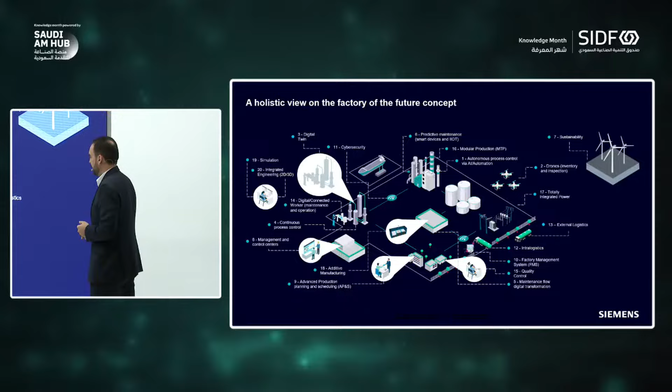So today, there is always a saying, what is the factory of the future? How today Saudi, SIDF, and the industry in Saudi can take it to the next step. If we want to summarize it quickly, there are at least 20 to 25 different technologies, main pillars, on how we can cover end-to-end value chain when it comes to digitalization.

All the way from the raw material part, how you source your raw material, how you ship it, how you clear it, how you manufacture it, how you package it, how you process it, and then even how you distribute it. All of these technologies make it difficult for companies, even tier 1 companies, to select which technology to use, which project should start first, at what pace, and does it make sense from a financial point of view to invest in these technologies?

Are these technologies really the right match for my processes? A lot of questions that we face with tier 1, tier 2, even tier 3 companies, asking does it make sense or doesn't it?

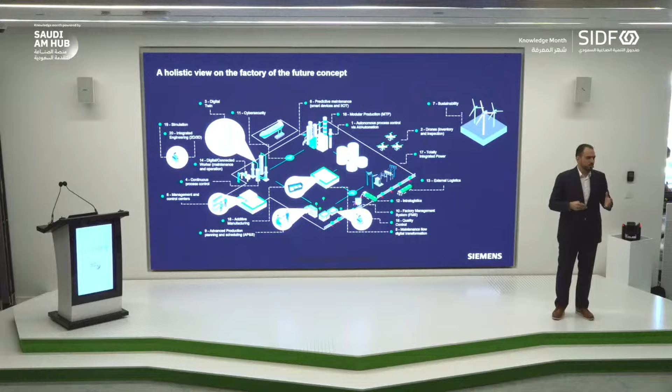And this is where we thought that digital transformation is not one fit for all. It is a tailored approach because it takes into consideration your objectives, your KPIs, your challenges, your existing landscape, and of course your future expansion or development plan.

So now I will shed some light on a title that is close to my heart because this is where I started at Siemens. I started 5 years ago as a digitalization consultant, and I've been blessed to work in Saudi with a lot of companies on this, and in UAE and Jordan. It was mainly about green, lean digital factories.

The question was, I'm a factory owner, I'm an operator, how can I maximize the utilization of the available resources? I don't want to make a mega trend when it comes to investments. I don't want to come with something totally heterogeneous for my setup, yet I want to double my productivity. I want to reduce my operating cost. I want to cut off all the fat I have in production, reduce my waste, etc.

A lot of questions, and this is where Siemens, along with a lot of tier 1 consultancy firms, came to an agreement that we need to work it out. This was at the time a cooperation between Siemens, BMW, McKinsey, to create something called the SIRI Index. I'm pretty sure you are very familiar with Siri. This is exactly the point, so we said we're going to create a framework, a methodology on how to do it in a systematic way.

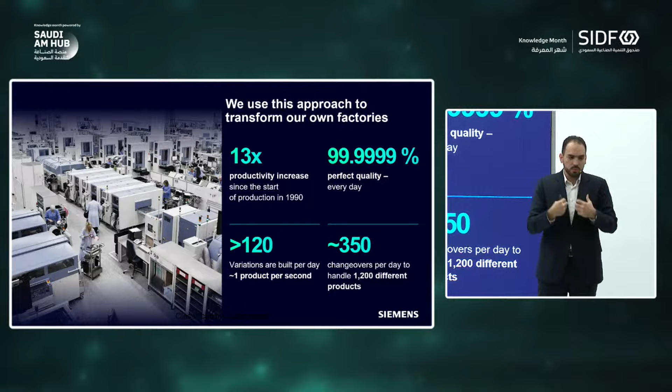It's worth mentioning that Siemens owns over 130 factories globally. This is where we manufacture our own hardware that you see everywhere in your day-to-day life. And this technology or methodology that I showed you today was applied to our factories. This is where we started, because we recognized that we need to do it ourselves, learn it, master it, and see the value out of it.

And since 1990, we were able to optimize or improve our production capacities by 13 times. I'm speaking, by the way, about the same plants. We have not added new lines, we have not built new ones. It's about the same plant itself being able now to produce more efficiently, less waste, with less human-intensive involvement. And the quality that was anywhere between 80 to 90% is now 99.9999%, which is what the market is requiring.

And the modularity — we have over 100,000 products within Siemens. Why am I mentioning this? Because within Siemens, with the innovation that we have in the market today, the need to have the capacity and the ability to produce new stuff within a matter of months is crucial.

And today we're going to speak more about the digital twin topic, how I can take a product from the ideation part to the production part. We need to shorten this, because time is money, as they say, especially when it comes to these products. After the challenges that we had in the supply chain, stock needs to be there always.

This is pretty much just an introduction. And this is what I always say: before you start building your digital transformation roadmap, perhaps it's worth it to take a step back and try to design a whole concept instead of just focusing on specific projects.

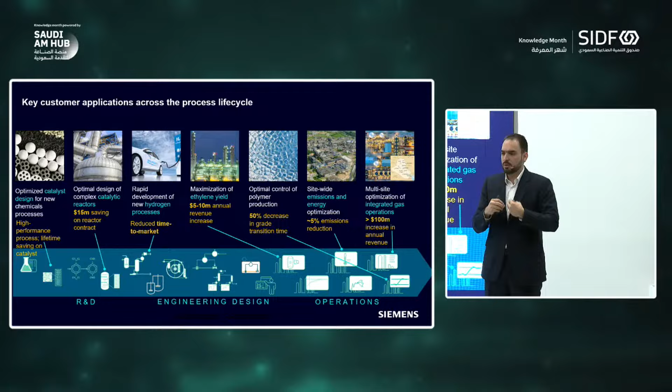So speaking about very technical, deep operations and processes that require not the high-level digital twin, I need a digital twin that is able to mimic my operation, how the chemical reaction happens, how the physics happens. And this is today available within Siemens.

This is just a quick example on how, basically for a complex of gas and steam turbines, the emission control and optimization is done. So basically, with today's technology, you are able to model your gas, your steam, your burners, operate them in sequence, and then optimize the yield based on the demand that you have from your operations. This is only a glimpse of how it can be done.

One of the key points typically required is that for any factory today, you have information on your ERP for finance, HR, warehouse. You have information coming from maintenance, from operation, from the spare part team, even from the safety team. All of this information, and even operation when it comes to the supply chain part - how many parts I have, what is the cost, etc.

So let's think together. How many dashboards, how many systems do I, as an operator, a decision maker, a manager, or even a shop floor engineer, need to access in order to know specific information? Typically it goes anywhere between 5 to 10, 12 systems, depending on the complexity of the setup.

So there was a big push within Siemens - and most of these technologies are used by ourselves in our factories - to minimize this. It doesn't make any sense. As an end user, I need one interface that is able to speak with all these data sources, contextualize this data, make sense of it, and then present it in different dashboards made available to the different functions within an organization.

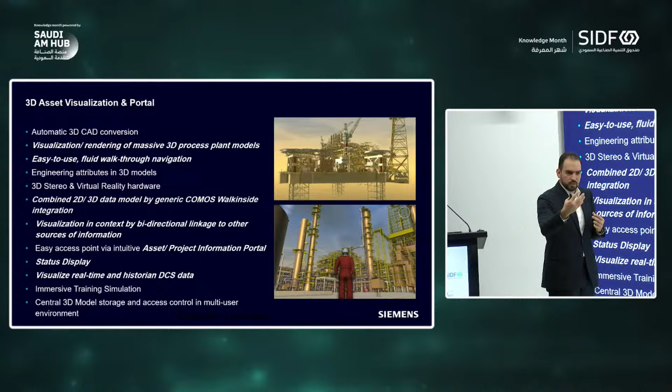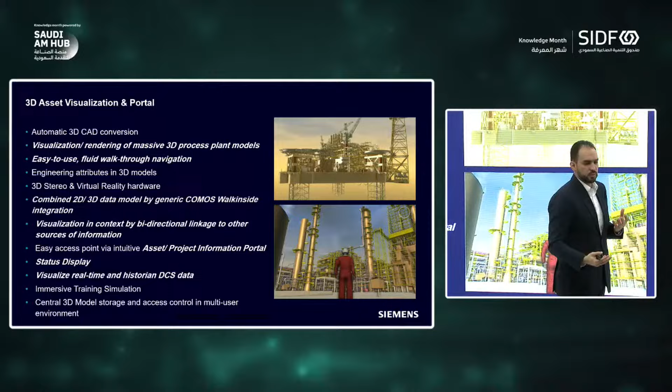Not only that, we are doing digital twin for a lot of things. A key part of a digital twin is, especially for new joinees and fresh graduates joining specific industries with harsh environments like oil and gas or chemical processing, there was a lot of push on how to do simulation of the training itself.

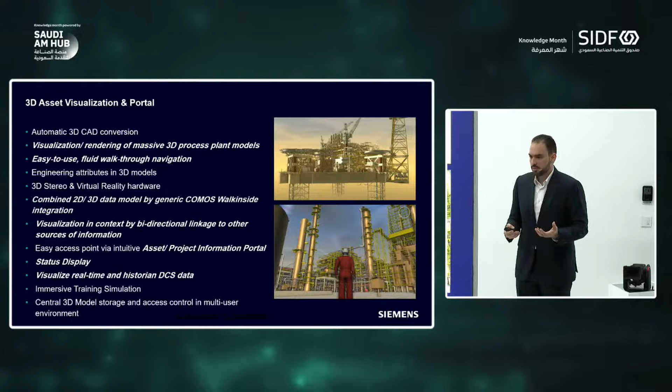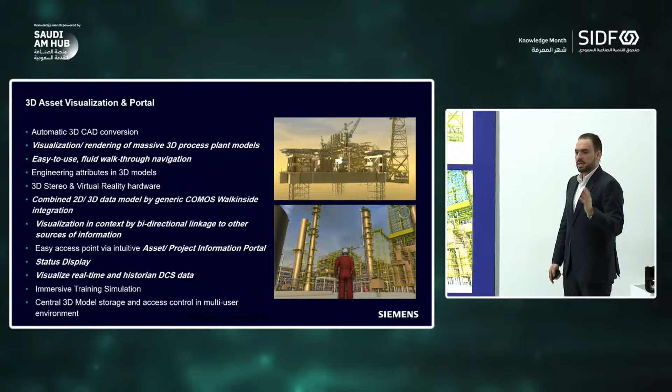This is where technology, along with the digital twin, has been able to help our customers globally to do 2D and 3D modeling, enabling full training for staff, from safety to operations, even first response in case of any incident. All of this is done in a risk-free environment.

This is more detail on how it typically works. Very recently, Siemens and NVIDIA joined hands to develop what we call today Omniverse, the industrial metaverse. We believe this is crucial not only for safety, but also for operations and training, and for elevating how we prepare a job applicant to be ready to start the job in a certain time.

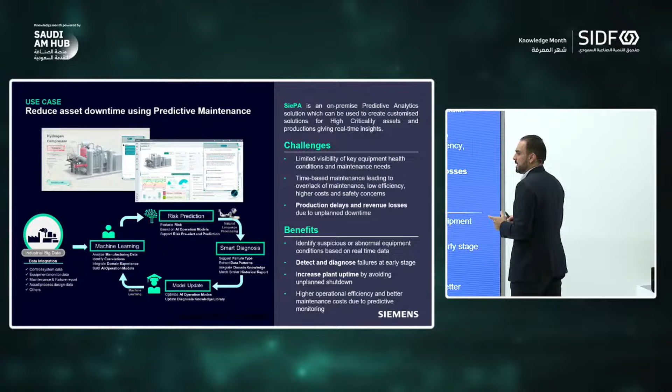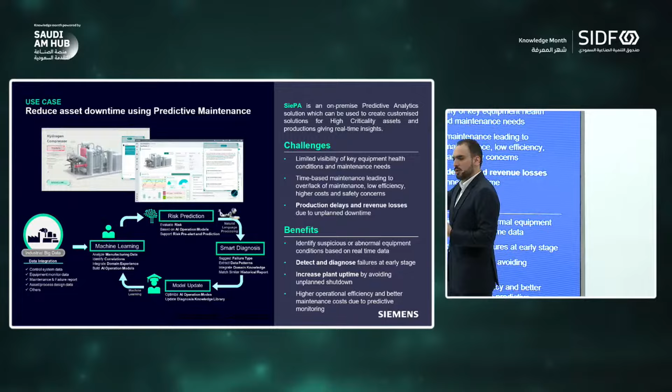As I mentioned before, most of the time we've been waiting for something to fail to fix it, or relying on someone walking by a pump or any rotating equipment to hear a voice, a noise, or a cracking sound and say, okay, this needs to be fixed.

Now with the technology that Industry 4.0 provides, we moved to something called predictive maintenance. The system is able to read symptoms typically not detectable by humans or regular systems, put these symptoms together, and evaluate what we call the fingerprint of this asset.

Sometimes an asset could go wrong due to additional electrical consumption. Sometimes it's heat because it's consuming more electricity. Or it could be noise, or simply not operating to the conditions it's mechanically meant to.

For a human this is difficult, and especially for mission-critical systems, you cannot as an operator or industry afford for a system to fail all of a sudden. This is where technology based on AI and machine learning is able today to predict days ahead that a machine with certain operating conditions could fail within X or Y days. This is crucial, and it's changing the way we address maintenance today.

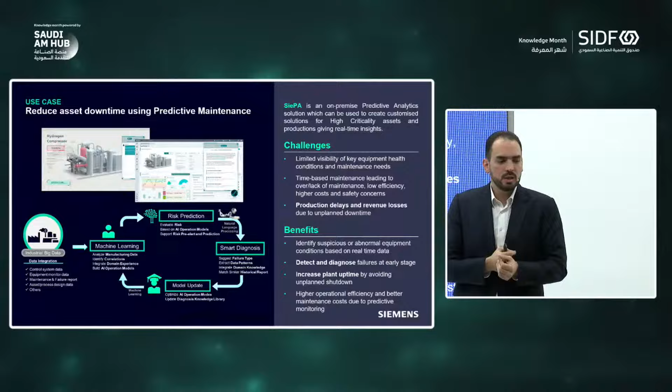Because despite doing preventive maintenance, which is like when you buy a car and the dealer says every 10,000 kilometers you come for a minor service, and every 30,000 or 50,000 kilometers you do a major service...

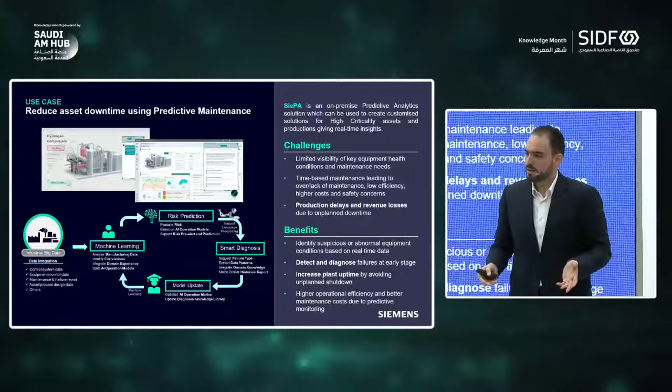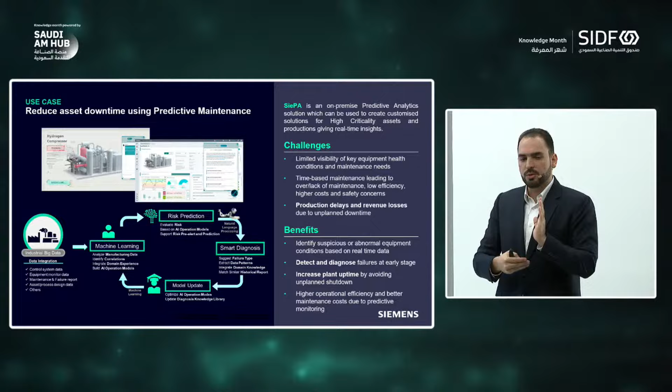That doesn't take into account how you actually drive your car. What if you're off-roading daily? Does the schedule still stand? Of course not. What if you're always cruising a thousand kilometers between Riyadh and Jeddah? It doesn't really stand either. Since each operation is unique, having preventive maintenance scheduled by number of hours, days, or production units is no longer viable.

So as we said, it's green, lean, and digital. One key topic we always want to highlight, especially for the future generation, our kids, grandkids, and generations to come, is that as an industry, whether process or discrete, we are responsible for 30% of CO2 emissions. This is high, but it's also an opportunity.

Whatever impact we make on this 30% will have a global impact on overall CO2 emissions. That's why governments like the Saudi government, the region, and globally are committing to a net zero strategy within the next 10, 20, 30 years. Siemens itself is no different; we've made a commitment to be net zero by 2030, which means reducing our CO2 footprint, going greener and leaner.

If we can save only 1% of this 30% CO2 emission, we are able to take off 90 million tons per year. Only 1%.

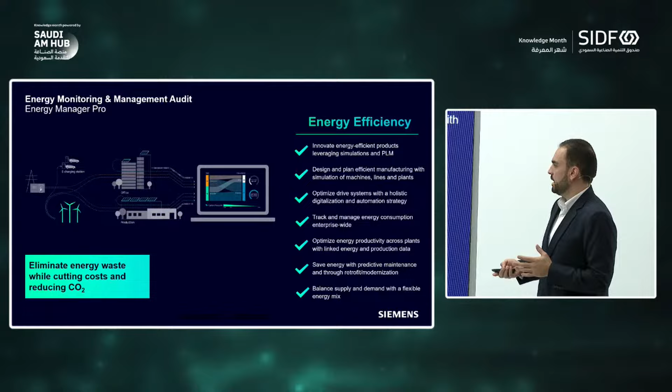In a nutshell, there are already developed methodologies and frameworks on how we can do this in a proper way that is recognized globally, especially with the vision of Saudi export to international markets, be it in the GCC region or to Europe or to the Americas.

Now there is more and more demand. I need to have transparency on the carbon footprint equivalent of each product that is coming out. And we see it from the fertilizer business to the cement business to the plastic and polymer business. All of these are now coming to us saying, okay, how can we help, how can we have a roadmap, how can we measure the CO2 equivalent of my product so I can improve.

I can show my clients that I am improving, because the mood of the consumers is changing greatly. Today, if you want to sell everything, you say this is, for instance, green. There was a hype before about organic, you could easily double your price of your product just saying this is organic. Now the hype is saying this is green, and it has a big financial impact on how companies are operating globally.

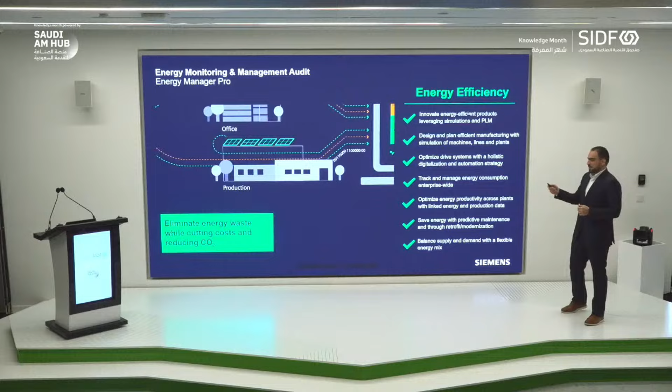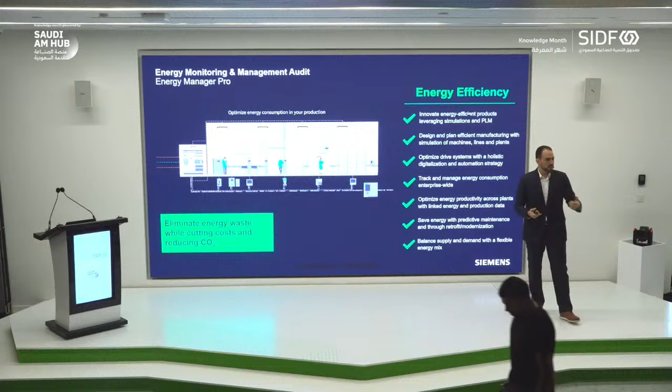One key aspect of this is, of course, related to energy management. And when I speak energy, it's not only electricity, it's gas, steam, charcoal, whatever energy source you have, and of course solar. Basically, having a system that is able to connect the information from all these data sources, to map it, to do a digital twin of these different systems, and to see the interaction between them when it comes to load versus what is generated, is crucial.

And this is where we as Siemens are able to help our customers, from the sensor level to the full solution level.

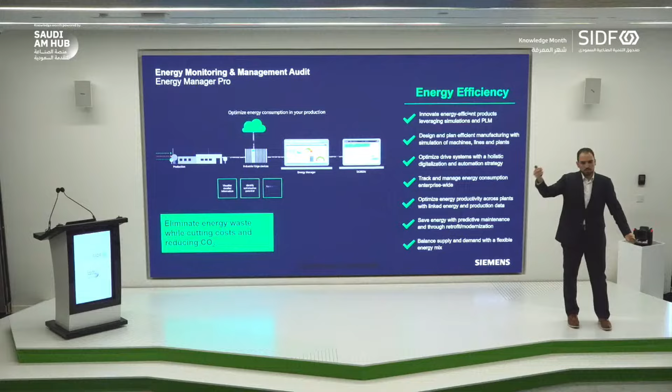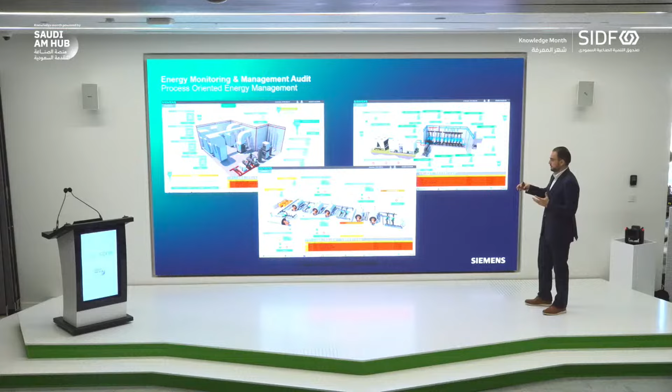This is an example of how typically we map different processes when it comes to the energy aspect, and how this is reflected from an operator perspective, how that looks like in real life. This is crucial, because a lot of times just looking at the numbers doesn't help. I need the system to tell me where I'm deviating, where things are going right, where things are going wrong, to what extent, is it acceptable, is this the optimum or not.

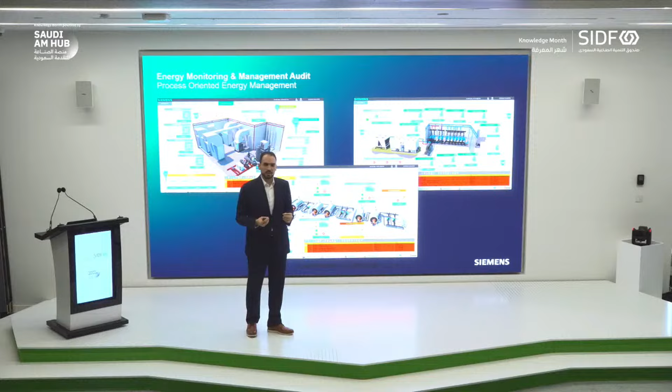And today, we don't have to rely on humans to do it only. There are systems that are more capable, more adaptable to do this, and are available in the market.

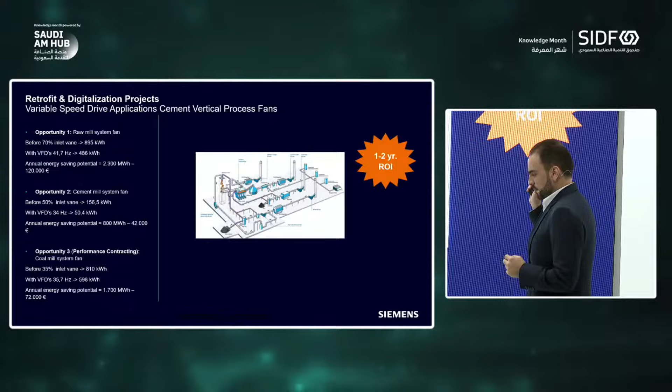So this is here where I'm just shedding light on some of the examples when it comes to the retrofit that typically happens after any energy management design or roadmap for our customers.

And bear in mind, ladies and gentlemen, any technology that we do has to make green, lean, digital, of course, but has to make financial sense. Down the line, these companies are about investment opportunities for the owners, be it private or public, right?

And whenever I come to an investor, an owner, a CEO, or a decision maker within an organization and say, you know what, you need advanced energy management, or you need to do a digital twin for X or Y, or whatever the case, the question is: okay, it's nice to have green, lean, digital, but what about the ROI? How can I quantify the value?

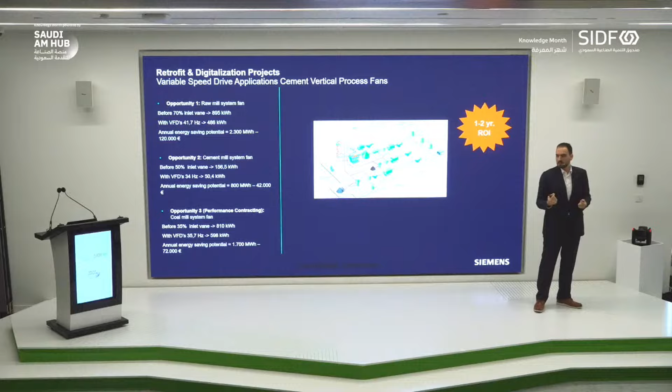And these are some of the examples. You see, a full retrofit for a factory that happened next door, and the ROI was realized in 2 years. Full return on investment in 2 years, which means 50% return on investment per year. No businesses today, when it comes to such an investment, are giving this, to make it clear. And then you benefit from the technology for the next 10 to 15 years.

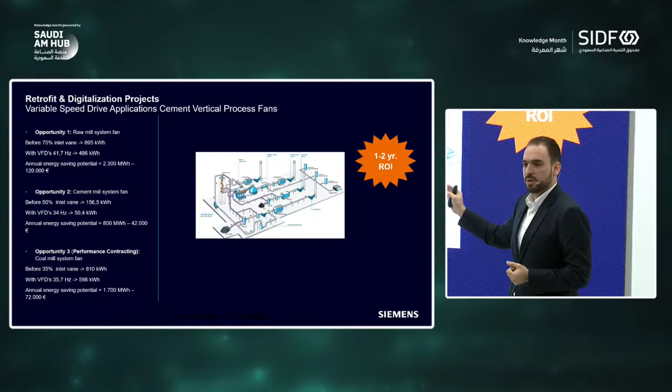So on and so forth. There was another example of a retrofit that has been done for another factory, and the ROI again was around 2 years.

As of today, most of the ROI is between businesses 10 to 15%. If the company is doing very well, it will be 20%. But these technologies speak for themselves because they are mature technologies, technologies that have been tried, executed, and done on different systems.

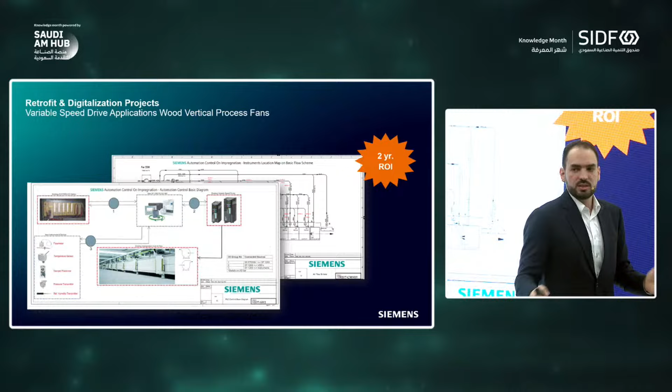So what I'm trying to say within these slides, digital is not just expensive, no. Digital is economical. It's not about the cheapest solution, it's about the most economical solution. It's about a solution where if I decide to invest in it today, I'm able to capture the value in the next 2 or 3 years. This is what matters from an industrial perspective.

Now, as I said before, we have a lot of technologies, and those technologies now, we are connecting shop floor to top floor to cloud. Now, from your mobile, you can apply for your sick leave and it's done. You have access to whatever information you want on your own drive at work.

There is a lot of push that happened in the market when it comes to the IT cybersecurity part, because we're hearing IT since we were in the universities. I think we are all pretty much the same age, except for the young ladies in there, 40, 50 age, right? So IT has been always there. Information technology has been always there. Firewalls, rules, demilitarized zones, sandboxes, this has been always there.

But the more we realize, the challenge is not really on the IT. IT is kind of secure. The problem we have is connecting these systems together created something what we call operational technology, OT. And now these OT are vulnerable. So whatever issue is coming from the OT, since OT is connected to the IT, it comes up to the IT, and then it's a mess.

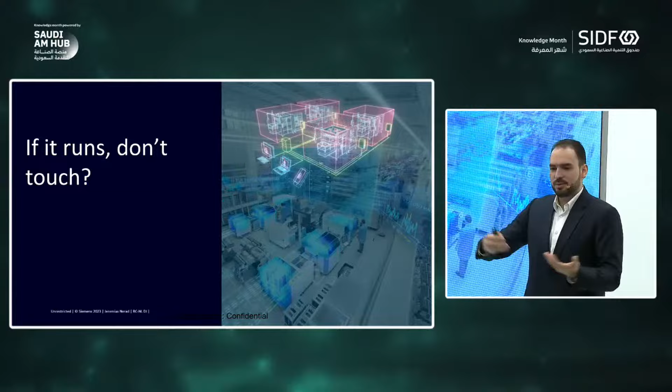And there was always a saying when it comes to the industry: if it works, don't touch it, leave it. But it's not anymore. We used to have the machines, especially in the factories, running on XP or Windows 95, all of these systems. No more, it's no more an option. Most of the new systems now, we cannot afford to keep them on these old operating systems that are obsolete. They are no more supported by any upgrade or any kind of follow-up because now they want to sell the latest one. So how do we bridge this gap? I'm not going to change a full factory operating system because it's no longer supporting Windows 95 or Windows XP, whatever the case. So this is where, as Siemens, we realized that.

But the question is, can it be sorted out? Can it be prevented? To a great extent, it is. However, we cannot take the IT approach in approaching OT, because IT and OT, despite now they are connected, they are different. How are they different?

Today, if you have a laptop from your work, after 3, maximum 5 years, the IT will come and take it back. It's now obsolete, they will sell it or scrap it, and give you a new one with the latest security updates, latest antivirus.

In the industrial world, it doesn't happen like this. I've seen factories still using Siemens S5, which is 45 years old plus, operational. I asked the guy, do you want to change it? He said, no, it's working, why do I need to change it? So keep it. The 3-5 year shelf life of IT doesn't apply for OT.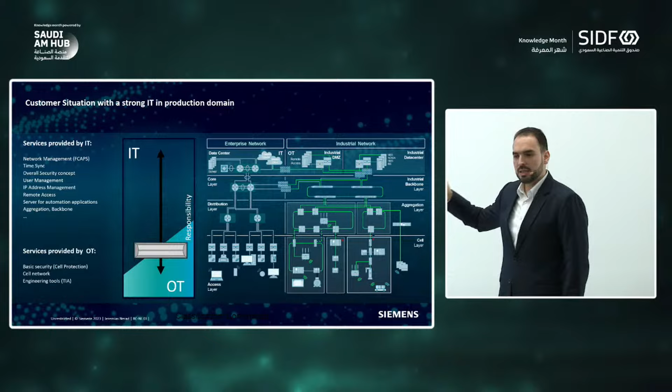This is a very nice display that I like to talk about. This is a typical enterprise industrial network. From a quick glimpse, you can see the industrial network, the OT network, is really the big one. This is in volume, in number of what we call tag points, in number of entries, in interconnectivity, much bigger than the IT one, despite the IT mainly covering what we call the enterprise layer.

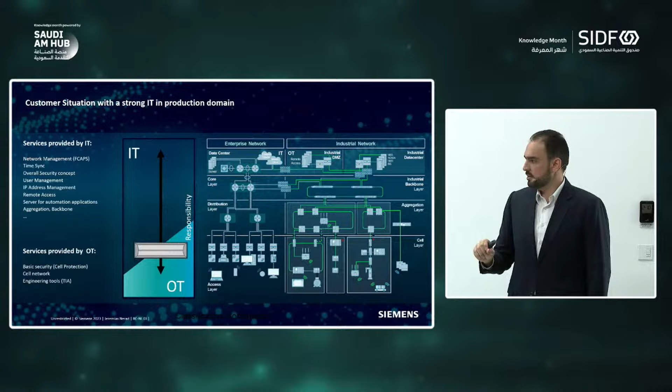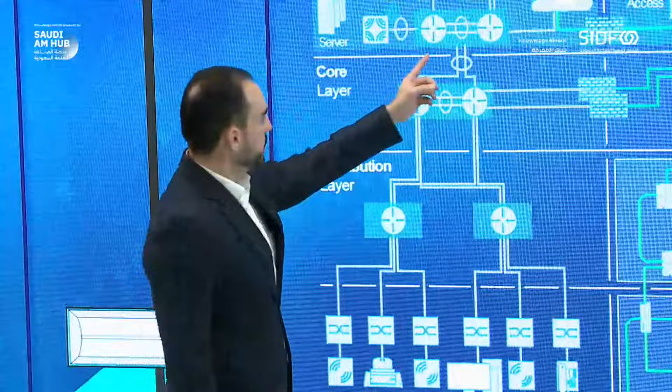What shield do we put on this? All of these things: time sync, security concept, user management, dual authentication, a lot of security patches. For this big chunk of the industrial network that's really speaking with the machines producing what we have, barely anything - barely anything as of today. This is where we believe there's a lot of work needed to elevate the OT network.

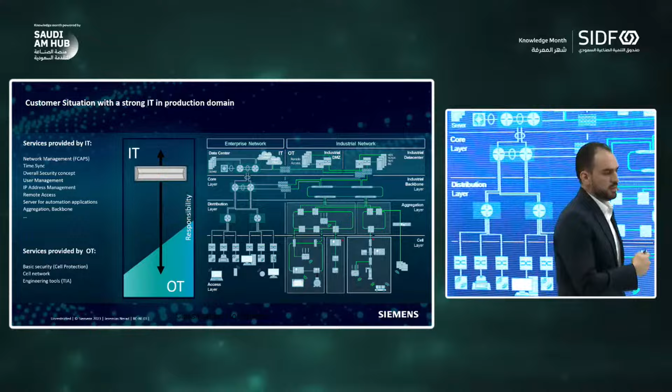To avoid unpredictable shutdowns - one thing I always said is that having a safe, secure network, you will realize the value of it once you are attacked. Unfortunately, most companies who learned the value of this learned it by experience. They went through the learning cycle. But it's not really needed.

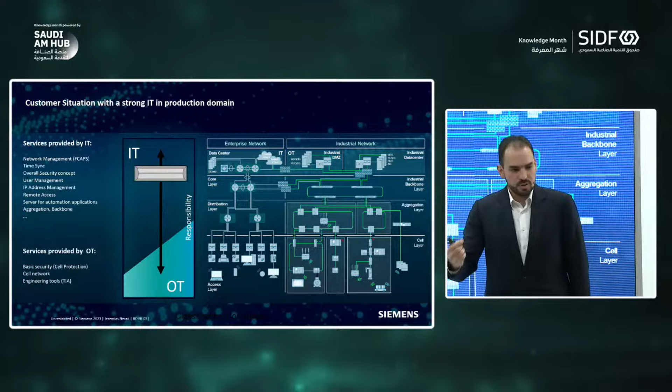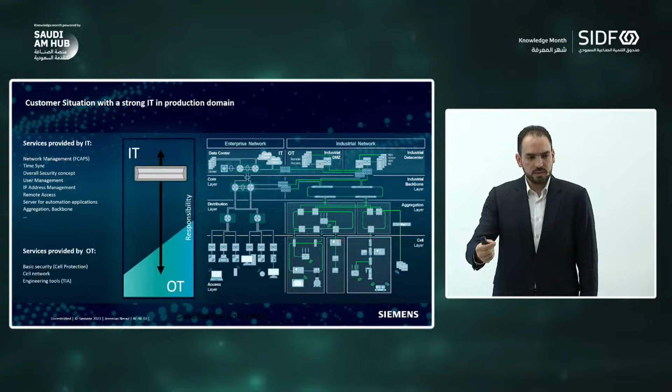There are now standards, international standards available in the market. Companies fully focused, like ourselves, on this. We know OT, we know automation, electrification, we know IT. We can make sure that those two parts are properly integrated.

So I wanted to give you an idea of how an OT design architecture is typically done, how we help our customers, how it's conceived today in the market. Basically, there are about 5 phases. It starts with: where am I today, where do I stand? Someone from the expert team has to come, look at your factory, and identify from a connectivity perspective where you are. This is the starting point.

And if you recall, we've done the same for green, for lean, for digital. The first thing is I know where I stand. And then it goes to: where do I start? Which area is more vulnerable? Which area is more exposed? Where is it nice to have, must to have, where is it a red light, a green light?

And then, which assets are mission critical assets? Those need high availability, high redundancy - I cannot afford these to go down by even a second. Just imagine for a second, you are in a steel factory or a glass factory, and we all know there's a furnace in these factories, and for your information, these furnaces don't go off.

If a factory has been running for 40 years, it means this furnace has been there working for 40 years, and doesn't stop in most cases. So just imagine these assets, for whatever reason, for whatever attack happened, this asset is shut down. In terms of the glass, steel, or aluminum industry, it means you have to throw this away because it's no longer of use. Just imagine all the glass and steel inside of it, what can happen.

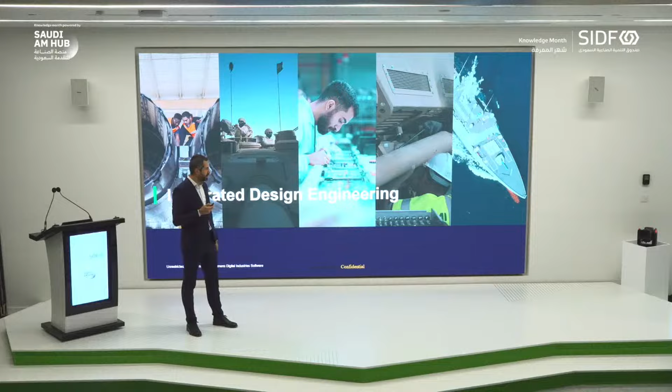By the way, I'm going to talk about this a little bit, but this discussion is I think kind of important as well. Then we look at newcomers. I'm from Turkey, and we have almost no natural resources - almost none. No gold, no precious metals, no oil, no gas, nothing. If we don't somehow work, we die of hunger.

Turkey is brutal. At the same time, Turkey's GDP is 1.4-something trillion dollars. We don't really have anything to help us either. What happened? Actually, what we did was something close to similar to China and Korea and Japan. We kind of followed the similar trend - we tried to copy what they were doing, just we did it bad, quite worse.

If you're going to buy machinery, who would buy from Turkey if there's a German equivalent, if the price is similar? Nobody. But we did it nevertheless, and we sold it cheap. Labor is cheap - we are like almost 100 million. It's okay, but we learned how to do it very good.

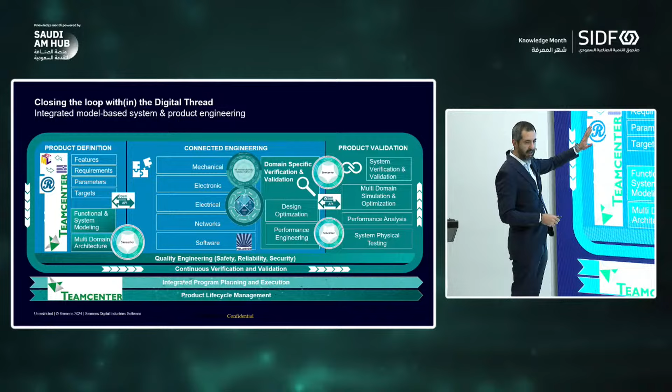That idea will be realized via mechanical, electrical, and software design. Look at automotive, or look at something very simple like a coffee machine. It has mechanical design, electrical design, electronics design, and some software. Pretty much anything.

Back in the day, most of our customers too, the world was revolving kind of slowly. They were doing all these design disciplines separately. So we would have some ideas, and then we would do these design disciplines, expecting that it would all work together.

Typically it doesn't, because what we had thought would not be translated to the design teams very well. And what they design will not be working at the first step either. So this link is broken at the start, typically.

And then let's say the design teams did it. It's time to see if these designs are working, right? You start simulation, and typically it doesn't work either. So this cycle goes back all the way to the start. We do it again, hoping this time it will work. It doesn't either. So this cycle continues for a lot of times, and a lot of effort is lost.

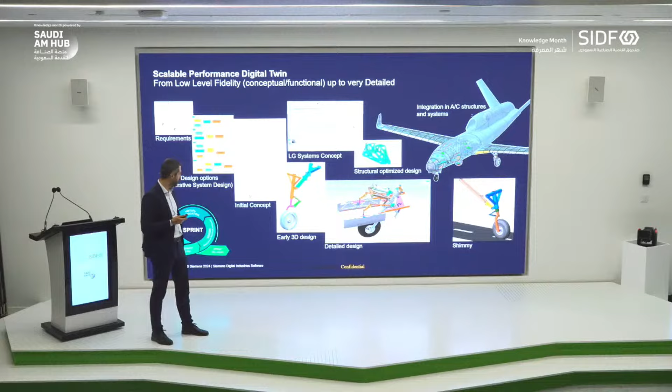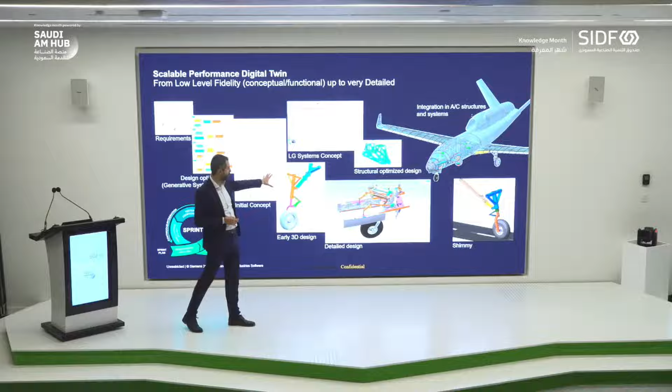Aerospace defense is a very mature and complex industry. This idea is applied in aerospace defense very well—they're like the frontiers of the world, if you look at it. They start from the requirements, the idea itself, before even designing; it will be modeled as systems, then designed mechanically, and then simulated. Otherwise, creating an airplane would be nigh impossible.

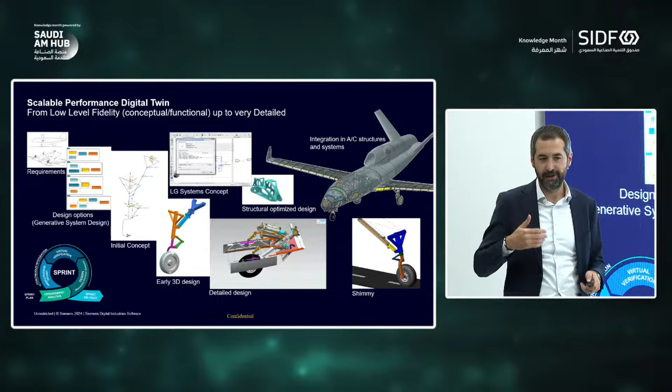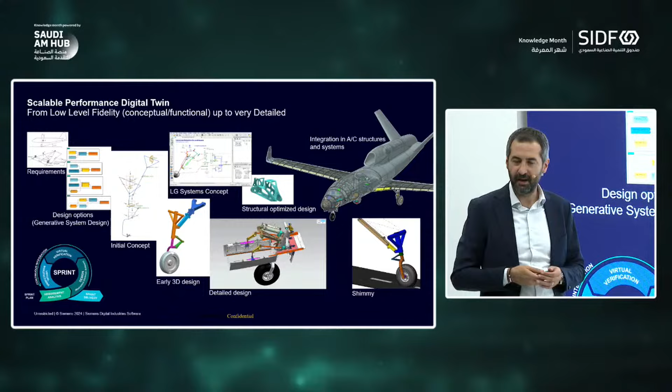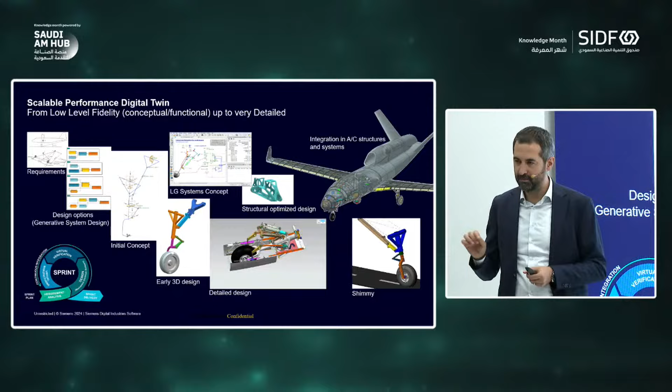If you try to do it the traditional way, just to give you an idea, older jets would have 15 to 20 years of development cycle. From the idea that the US government gives a go-ahead to start working on a jet, it would take 20 years for them to manufacture it, because it's difficult. But now it's not that difficult. Just to give you one example, Boeing doesn't use any paper-based drawings. If you go to Boeing, from idea to manufacturing, you'll not find any paperwork, no paperwork orders, nothing. Everything is digital.

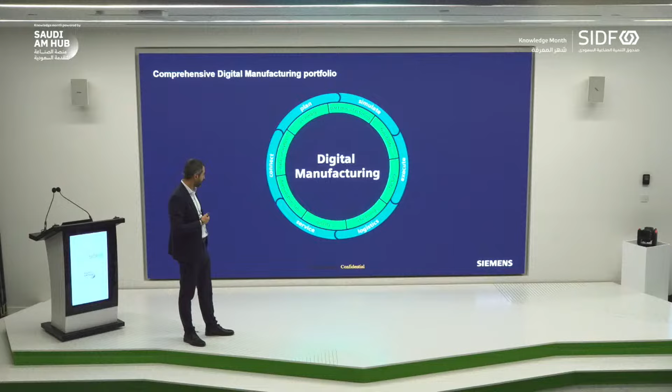So that was the design part. Let's say we have a product, we have an idea—how do we manufacture it? That's the second step. Now, let's say you finished your design, you have an idea and you designed it. How are you going to manufacture it? How are you going to plan to manufacture it, how are you going to manufacture it, and how are you going to service it?

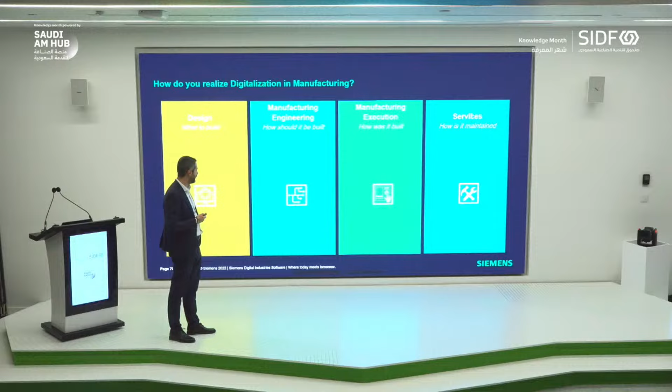Because this whole cycle, again, you could be doing it in a traditional, old way, and it's going to be very ineffective. Or you could do it in an integrated way, and this is called closed-loop manufacturing.

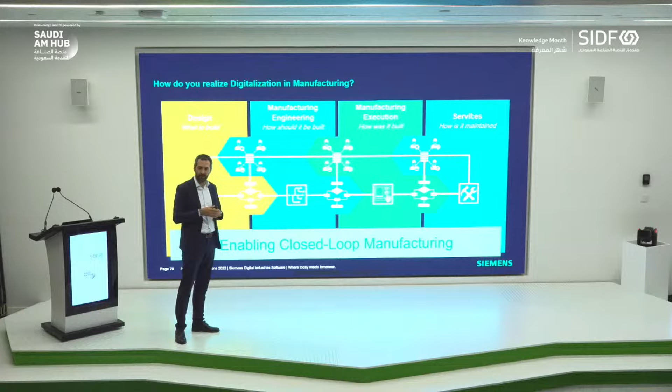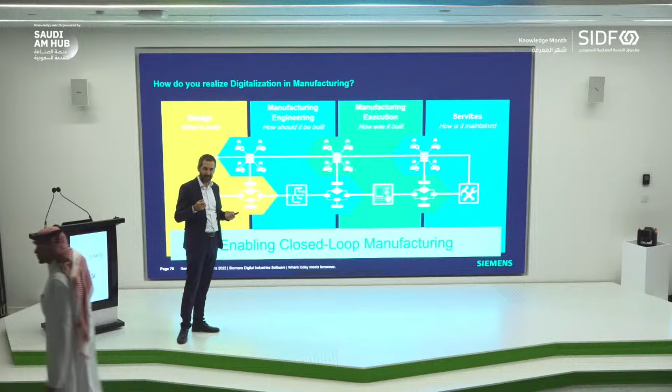The idea is kind of similar to design. So basically, it's like following the Industrial Revolution. First it was steam—what did steam achieve? It converted human labor to mechanical labor, saving efficiency on human work. Then it was the electrical revolution, which increased the efficiency of steam as well. Then it was automation, which again increased the efficiency.

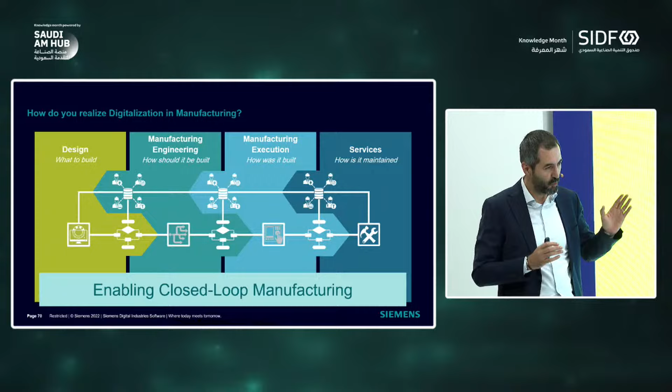You remember Maya said that Siemens factories have become 13 times more productive, 13 times more in the same space. It's just trying to go with that efficiency. And this closed-loop manufacturing is pretty much the same idea.

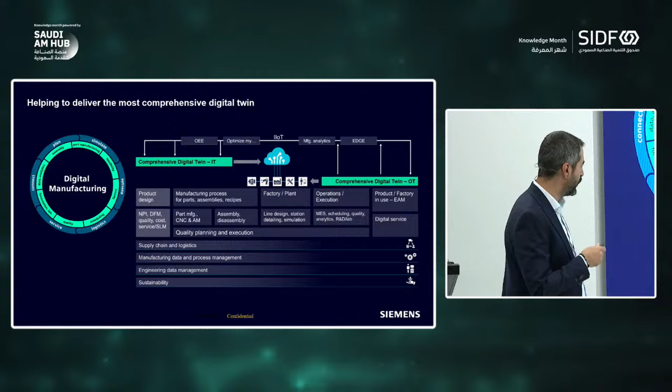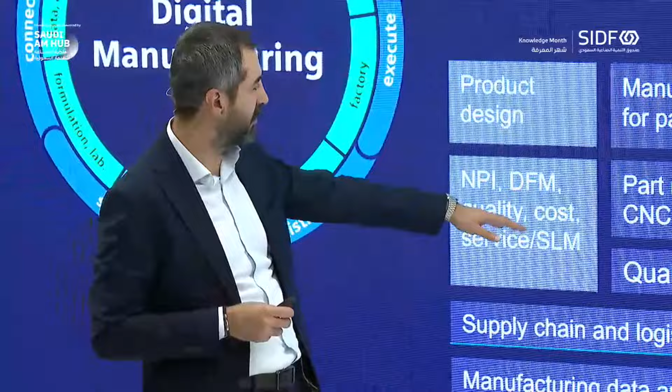So we can look at it in a bit more detailed way on how Siemens sees it. There's going to be a product design. You start from there, then plan how to manufacture this product. How are we going to machine it? How is it going to be assembled? How are we going to design the lines? Then how are we going to execute it?

Our solution set ties all of these together. Then there's quality planning and execution - you have the design, how are you going to push it to the shop floor? This again is going to be linked. Then there are some auxiliary disciplines as well, like how do you do the supply chain, how are you going to do the data management, change management, so on and so forth.

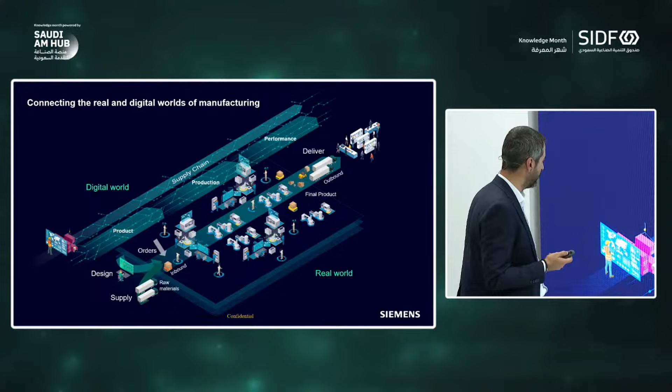But the idea is you have your factory, right? You start from product design till manufacturing, all of it intertwined. This is kind of a visualization of how this comes. A product comes here, the design, the idea of the product, and then raw materials come. You make these two together to create a product, and you deliver it.

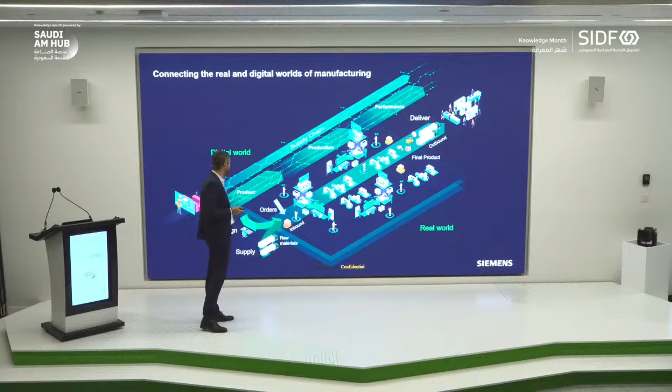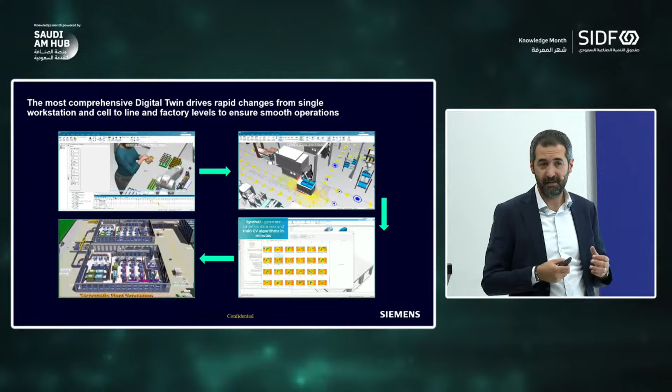Let's move one step ahead. The idea is, of course, to get this interlinked together. But how do you do it? It's easier said than done. We have 20,000 products. It doesn't make sense to go over all of them. Just the idea of getting everything connected is important.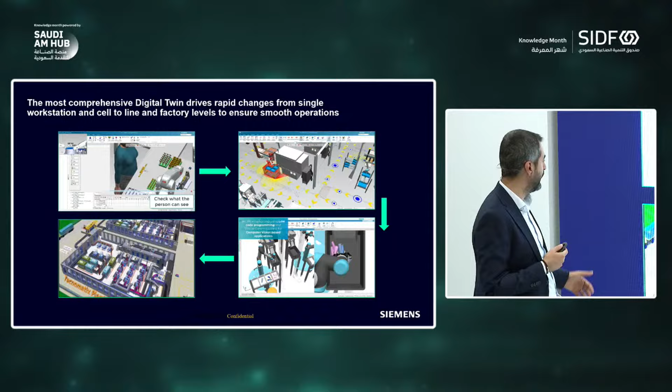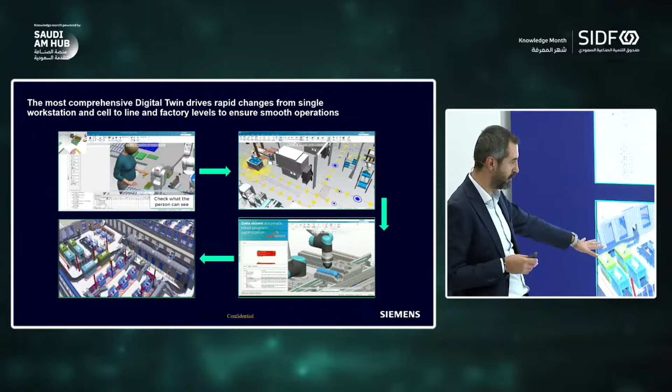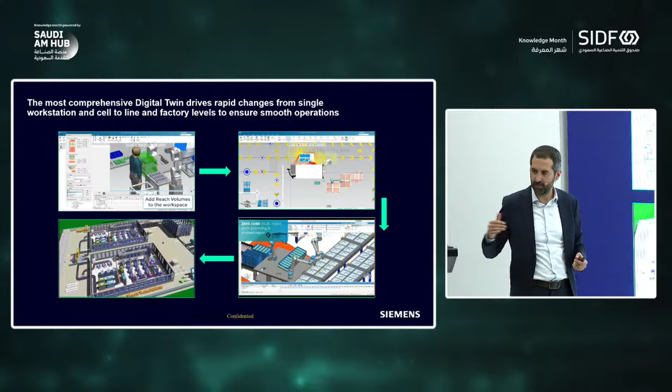In this scenario, for example, before doing a plant, we simulate how the lines and the plant layout will be, even to the point that the operators, the humans, are going to be simulated. So before you design your plant, you see how efficient it is. You try every scenario, because building a plant is expensive. You cannot do it many times. You have to make it right from the start. And if you fail from the start, you're going to end up with a plant that's inefficient for a very long time. We can do all of these together.

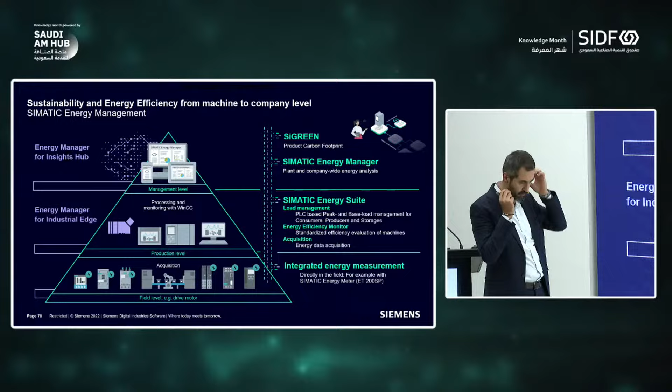Okay, this is just a high-level architecture of an energy management solution that we have with the IoT platform. So I said that I'm from Siemens Software, right? Maze is from Siemens Automation, and together we cover pretty much the whole stack.

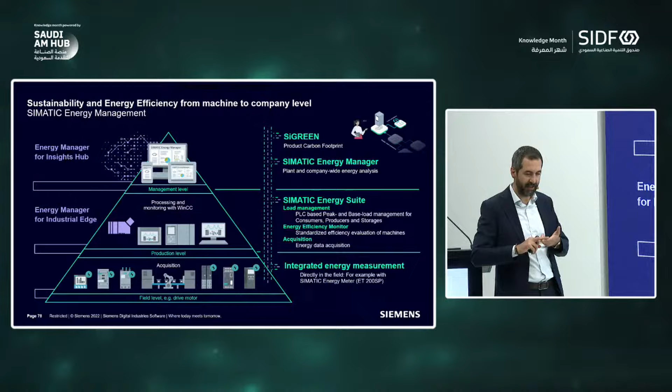It's not just a software that we give to you and say goodbye. On the contrary, we start from the sensor level, from shop floor level, and build the whole stack with you, so that when it comes to energy management, for example, we have this.

Is it falling? Okay, still? Okay, sorry.

So we have the full stack with you. We can sit down with you, focus on your needs, see where the maturity of your plants is, and build this together.

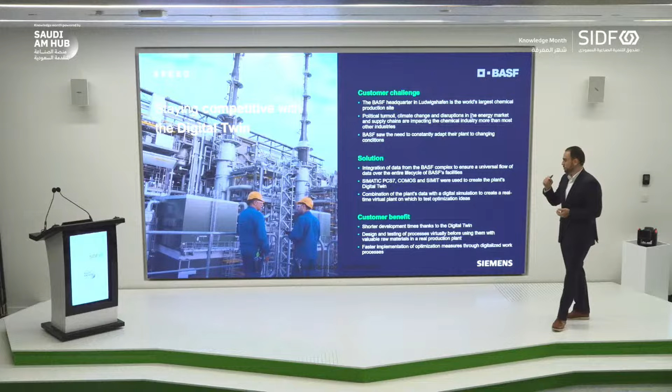This is an example. Another example was related to BASF, again another chemical processing factory. It's all about speed, time to market. This is a crucial part, and how much they were able to shorten their time to market on this.

Another example, and in fact this was at GITEX just a couple of weeks ago in Dubai. We see, unfortunately, with the geopolitical issues and the wars that are in the region and globally, typically how much a prosthetic arm is costing today, or a limb in general. It's anywhere between $50,000 to $100,000. Siemens started 3 years ago a program with one of our partners on how to make this a single-digit number, anywhere between $1,000 to $10,000 for a hand, a limb, a leg.

And that was the whole idea: how we can build a full prosthetic limb, arm, leg, whatever the case, in a digital environment as a digital twin, tested, validated, and not off the shelf - that's the problem with prosthetics today. If, God forbid, someone needs a leg or an arm or any limb, he has to go there, try to fit it, adjust it. No - today with digital twin technologies and additive manufacturing, what we call 3D printing, we are able to help our customers build individual limbs and prosthetic parts for end users, for a fraction of the cost that used to be.

As I said, from $50,000 to $100,000 is today 90% cheaper. And 3 weeks ago, it was shown in GITEX, where we are able basically to create almost a full hand, 5 fingers with the cap from here and all the way to the elbow for less than $5,000. This is how technology can make a difference, ladies and gentlemen. And this is an example that is really interesting, because we're suffering from this, and unfortunately this is not really a nice story to tell, but this is where technology can make a difference, a big difference, right?

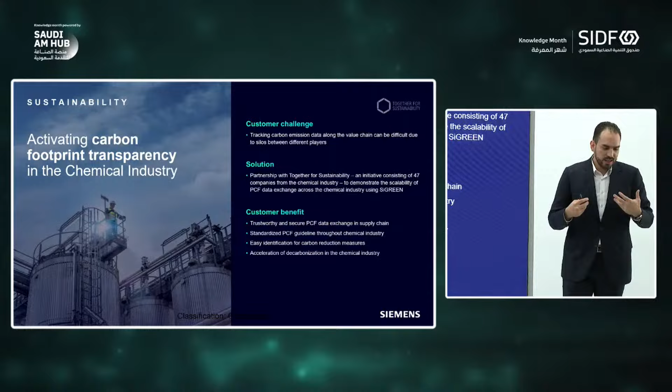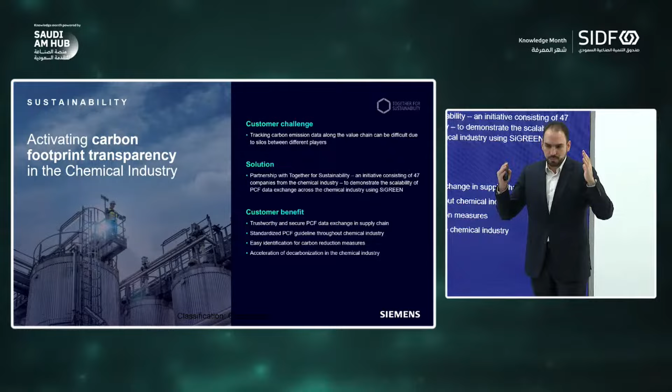When it comes, for instance, to the chemical industry - why I'm saying chemical industry? Because this is where the competition is really going tough, especially with the new entry coming from China and from India. So even the existing players, be it in the GCC, in the MENA, or the whole Europe, there is a big push to modernize, digitalize, and lower the operating cost in there.

Another example was for wastewater treatment, and we are already engaged with Saudi authorities, be it Saudi water authorities or national water authorities, on multiple topics on how to improve water treatment, how the water can be reused, not only once but multiple times, and to what extent. In some places, especially Scandinavian countries, sewage water is not only used for irrigation water - it has reached a level where this water can be reused for even direct human consumption. Perhaps there's a different approach there, but it tells where the technology is driving when it comes to reusing water. We all say that oil is the black gold, but with the scarcity of water we're having, water will very soon be the real conflict. We see nowadays the start of conflict on water - it's already happening, it's not futuristic.

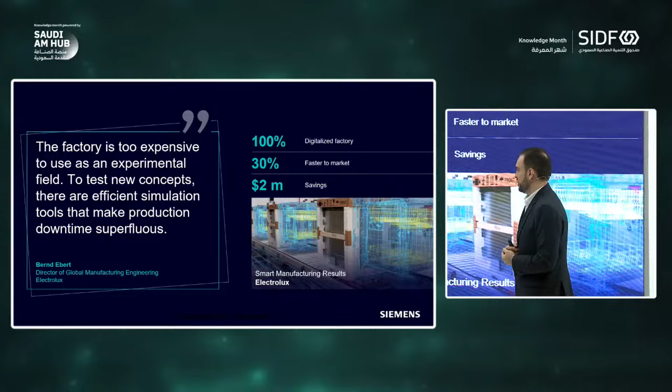Here's another example with some numbers that could add value. This is a company, Electrolux. I'm pretty sure most of us use their products in one way or another. It's basically about how to test these machines before the end customer uses them. Quality was a point Ahmed mentioned big time.

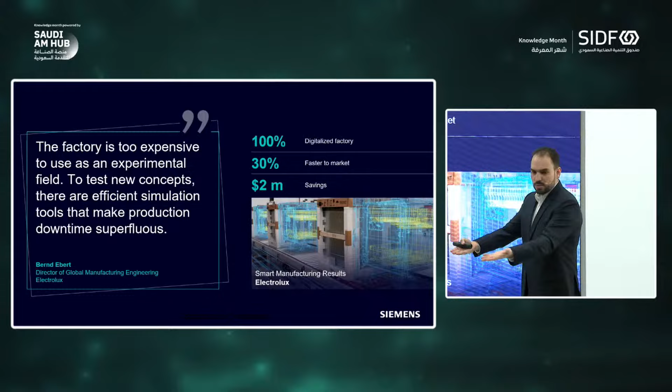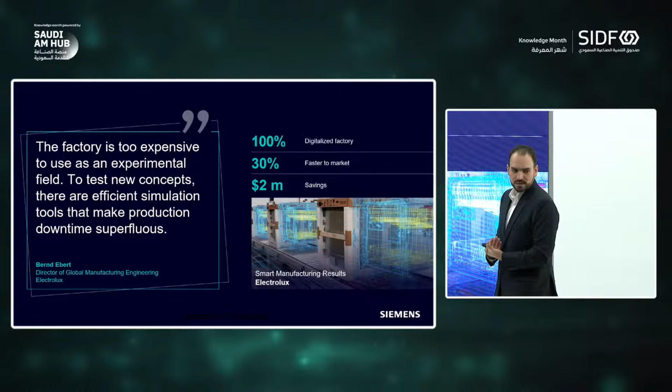Today we've reached a level where, when it comes to the supply chain part, the cost of items is clear. So either you differentiate on price and product price, or on quality - it depends on what your market is. We're all now talking about Chinese cars. Chinese cars used to have a reputation for quality issues - that's no more there. Now Chinese cars are as good as European cars, and even European cars are now struggling.

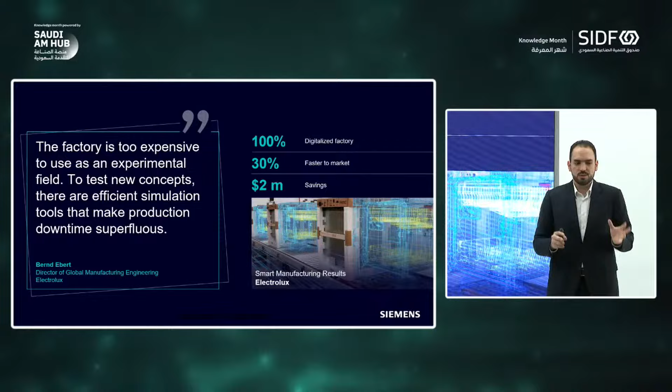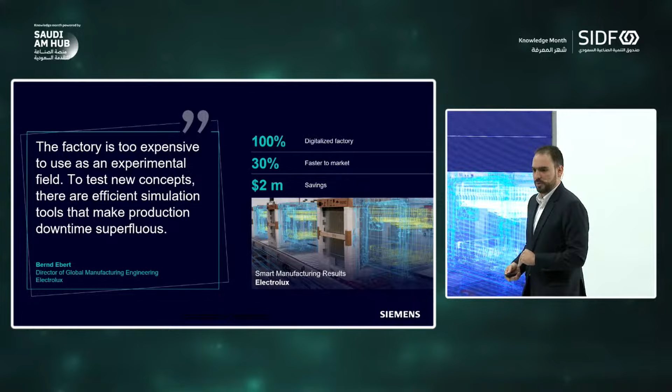How are we going to compete? Such technologies, when it comes to efficiency, are no longer nice to have. There's now a big move within Europe on how to make these factories really top-tech factories, to reduce operating costs so they can compete with competition in the market.

So with that, we come to the end of our presentation. Hopefully it was smooth and fruitful. Thank you very much for your patience. Barakallah fikum, thank you.